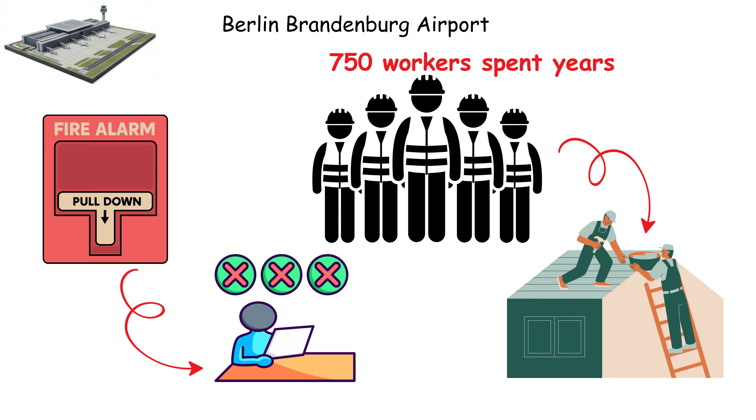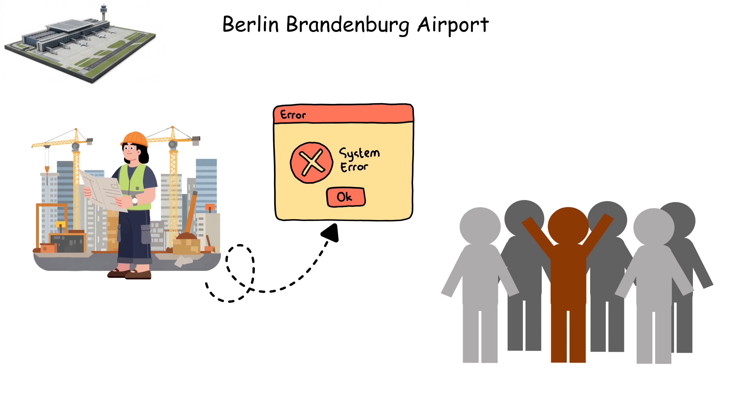Here's the number that stops everything: the opening was postponed 170 times over 14 years. The problem wasn't ambition. It was a fire safety system so fundamentally miscalculated that 750 workers spent years inside a finished building trying to fix it. Cabling was wrong, smoke extraction didn't work, and every fix revealed 3 more problems underneath. No single contractor owned the failure, so everyone passed responsibility in circles. The lesson: complexity without accountability is just expensive chaos. When nobody is truly responsible for the whole, everybody becomes responsible for nothing.

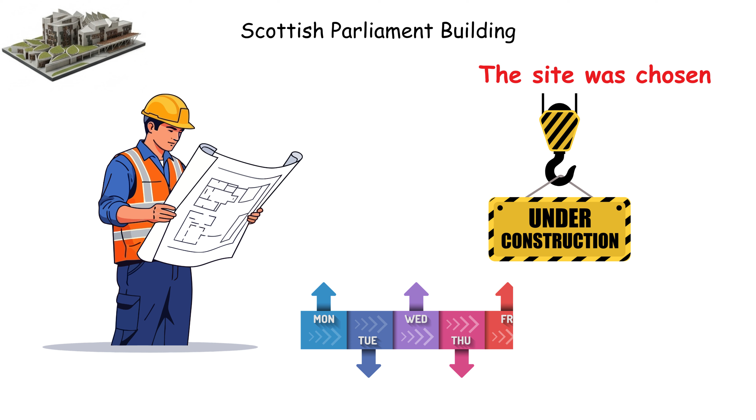Scottish Parliament building, 1997. The newly devolved Scottish government needed a parliament building. The estimated cost was $40 million. The site was chosen, the architect was appointed, the timeline was set. Scotland was getting its democratic home for the price of a modest office development.

The design by Enric Miralles is genuinely striking. Organic forms inspired by upturned boats and the Scottish landscape. A building that actually looks unlike any other parliament on Earth. Architecturally, it earned its awards.

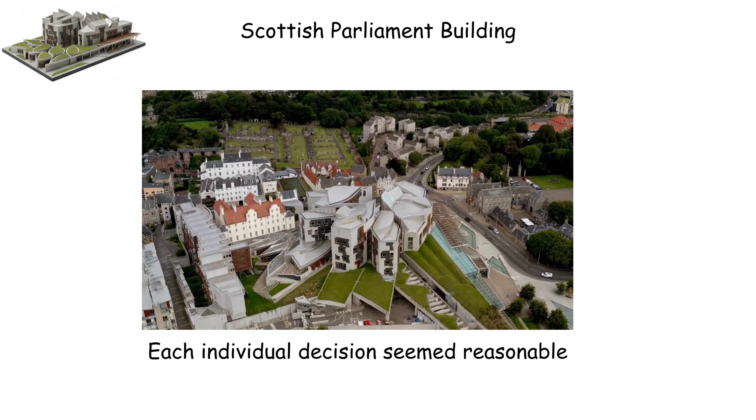The final bill came to $414 million, 10 times the original estimate, for a building covering less than a city block. The core problem was a design process that kept evolving after construction had already started. Changes were approved mid-build, costs were concealed from Parliament, and nobody had full visibility of the total. Each individual decision seemed reasonable; the cumulative effect was catastrophic. The lesson: approving a design and approving a budget are 2 different commitments. When only one of them is fixed, the other will move in only one direction.

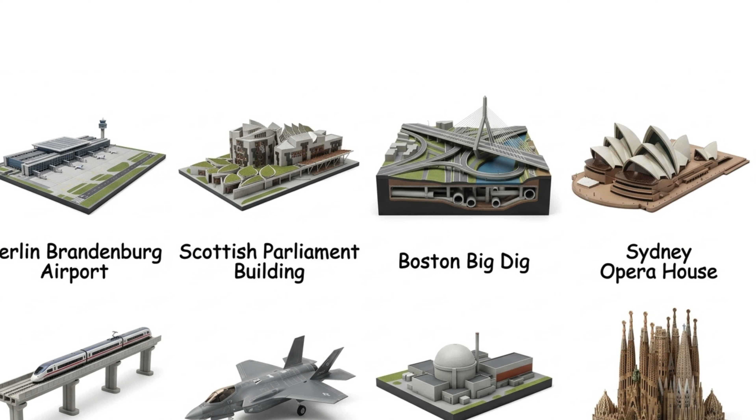Boston's Big Dig. Boston's highway system was strangling the city. The solution was audacious: bury the main interstate underground, replace an elevated eyesore with a surface park, and reconnect downtown Boston to its waterfront. The 1980s estimate was $2.6 billion. Congress approved it. Engineers started digging.

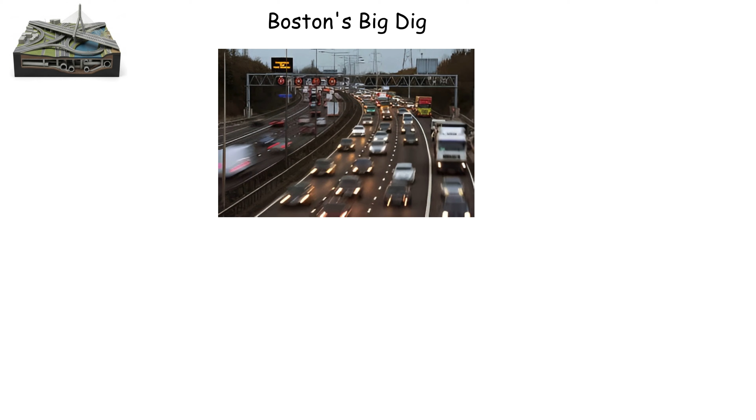The infrastructure delivered is genuinely transformational. The Rose Kennedy Greenway replaced a concrete highway with 1.5 miles of public parks. Tens of millions of vehicle trips now move underground every year. Boston's downtown is fundamentally more livable because this project exists.

The final cost was $24.3 billion, nearly 10 times the original projection, making it the most expensive highway project in American history at the time. Digging under a living city full of centuries-old utilities, unpredictable geology, and active subway lines meant constant surprises with no pause button. Political pressure kept the project moving even when costs exploded. Stopping was never on the table because too much had already been spent.

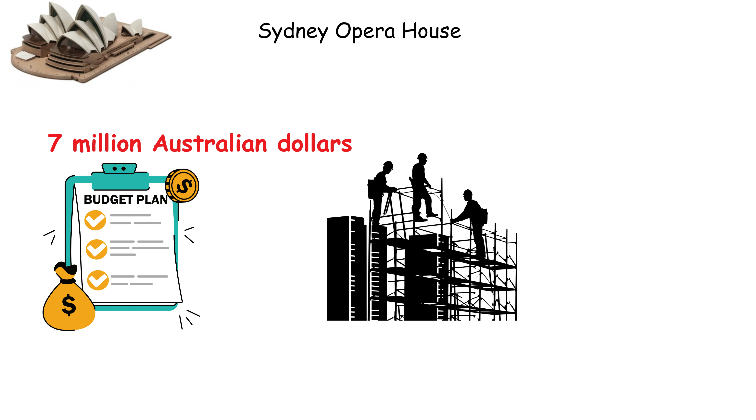Sydney Opera House, 1957. Danish architect Jørgen Utzon won an international competition to design an opera house for Sydney Harbour. The budget was $7 million Australian dollars. Construction would take 4 years. Australia would have a world-class cultural venue by 1963.

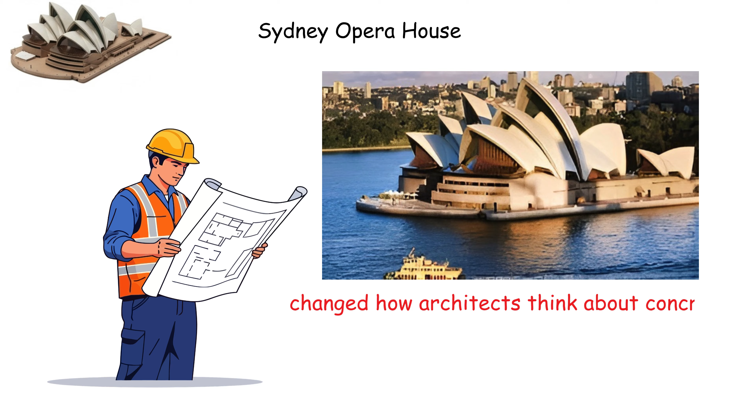What got built is arguably the most recognizable building on Earth. The shell roof structures are genuine engineering breakthroughs that changed how architects think about concrete. UNESCO made it a World Heritage Site. It appears on more postcards than perhaps any structure built in the 20th century.

It opened in 1973. The final cost was $102 million Australian dollars, 14 times over budget, a decade late, and Utzon never set foot inside the finished building after being forced off the project mid-construction. The problem was that construction began before the design was resolved.

Politicians wanted groundbreaking photos before the engineering was finished. Solutions to structural problems that hadn't been invented yet had to be invented mid-project, on the public's bill. The lesson: starting before you're ready doesn't save time. It just moves the problem forward and makes it more expensive.

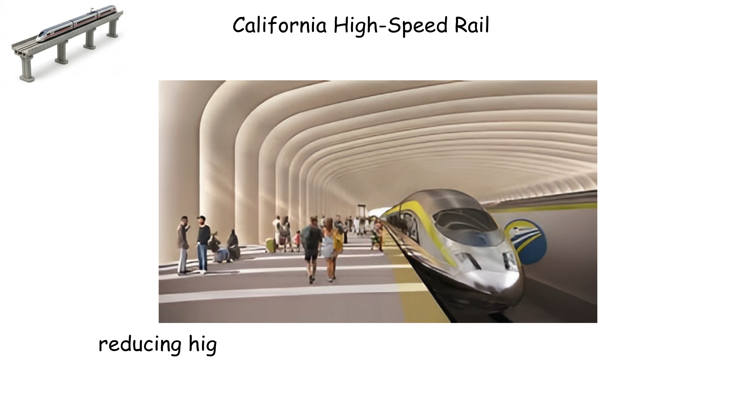California High-Speed Rail: California approved high-speed rail in 2008 with a voter-backed budget of $33 billion. The promise was a train connecting Los Angeles and San Francisco in under 3 hours, running on renewable energy, reducing highway and airport congestion across the state.

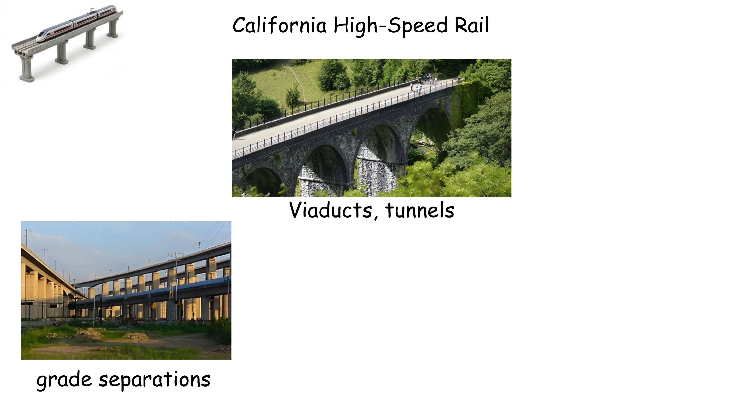The engineering work underway in the Central Valley represents genuine progress. Viaducts, tunnels, and grade separations are being built through some of the most geologically complex terrain in North America. The construction that exists is real infrastructure.

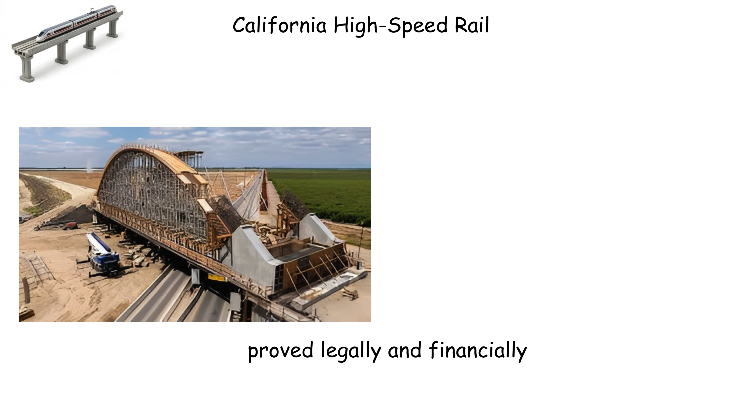The current projected cost is $128 billion. The projected completion date has moved so many times it is no longer taken seriously. Land acquisition across hundreds of miles of private property proved legally and financially catastrophic. Environmental reviews, lawsuits, and local opposition added years to every segment. The original cost estimates assumed a political smoothness that California's real estate landscape made impossible.

F-35 fighter jet program: in 2001, the United States awarded Lockheed Martin a contract to build the F-35 Joint Strike Fighter, one aircraft to replace multiple platforms across the Air Force, Navy, and Marines. The original program cost was estimated at $233 billion.

It would be the most capable fighter jet ever built. What exists is genuinely formidable: stealth capability, sensor fusion, vertical landing variants, and combat systems that represent the leading edge of military aviation. Multiple allied nations have integrated it into their air forces. As a piece of engineering, it is without equal.

Total program cost has now passed $400 billion, with lifetime operational costs projected beyond $1.7 trillion. Building one aircraft to satisfy three branches of the military with fundamentally different requirements meant constant design compromises. Every branch needed something slightly different. Every compromise added weight, complexity, and cost. No single requirement was ever sacrificed to protect the budget.

Olkiluoto 3 Nuclear Plant: Finland approved a new nuclear reactor in 2002. The European pressurized reactor at Olkiluoto would be the first new nuclear plant built in Western Europe in over a decade. Cost, $3 billion. Completion, 2009.

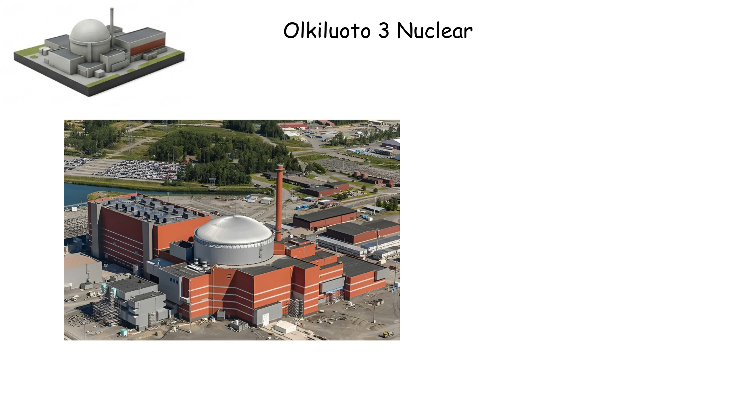It would provide clean baseload power and prove that nuclear energy still had a future in Europe. The reactor that eventually came online is the most powerful in Europe, 1,600 megawatts of carbon-free electricity feeding the Finnish grid. The technology works. The output is real.

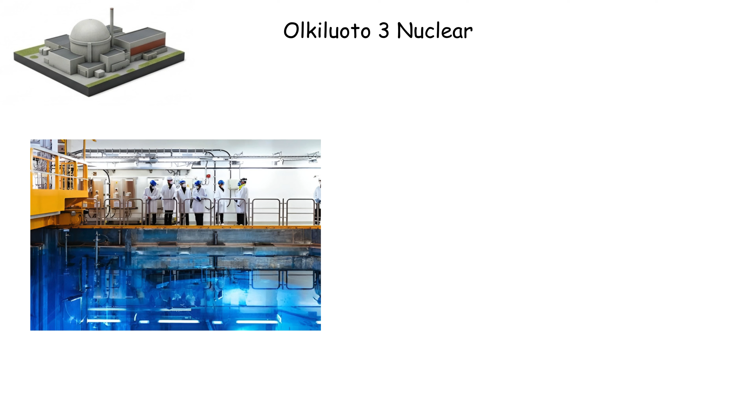It took until 2023 to turn on, 14 years late. Final cost, approximately $11 billion. No single Western European contractor had recently built a reactor of this design. Skills, supply chains, and regulatory frameworks had all atrophied during the long pause in nuclear construction. Every weld required new certification. Every component required re-engineering. Experience that once existed had simply retired.

Sagrada Familia: in 1882, construction began on Antoni Gaudí's Basilica in Barcelona. The building would be complete within decades. Barcelona would have its monument.

What is being built is unlike anything else in human history: 18 towers, hyperboloid vaulting, stone facades carved with the density of illuminated manuscripts, and a structural system so complex that it required 21st century computational modeling to fully understand Gaudí's original intentions.

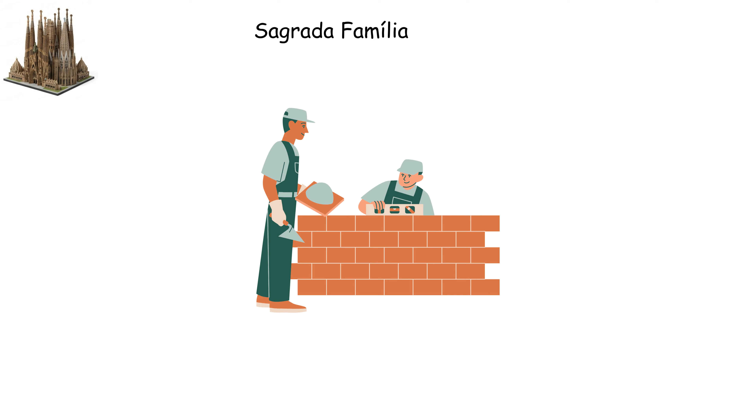Construction has been continuous for 142 years. Across that span, every decade has produced its own budget reset. No overrun here has a single villain. Wars, the Spanish Civil War destroying Gaudí's original models, shifting donation revenue, and the sheer impossibility of the design all contributed. The project has outlived every person who started it, multiple times over.

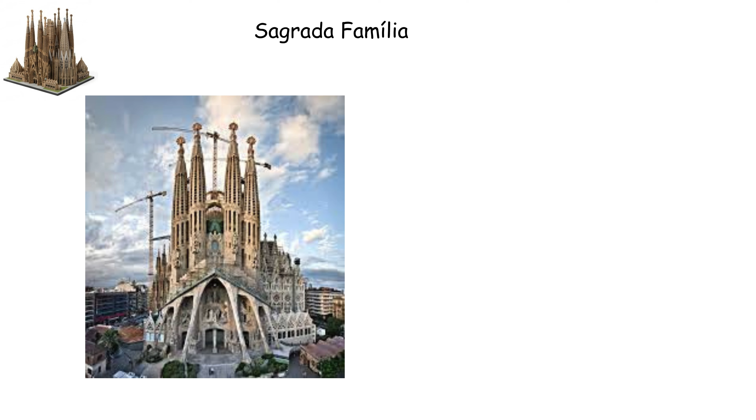The lesson: some projects aren't over budget. They're simply generational. The error isn't in the spending, it's in pretending from the beginning that a finite estimate could contain an infinite vision.